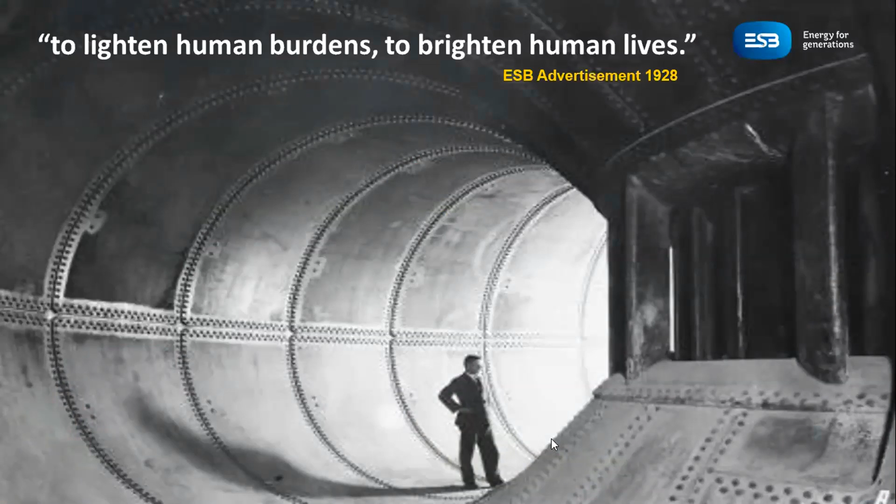As Con mentioned in my introduction, beyond 30 years now. Last September was my 30th anniversary with ESB, and I've spent a lot of time through various business units. And currently seeing very, very significant changes in the organization in terms of the challenges that we're facing. Interesting, just to look back to 1927, 28, when ESB was first established, and we reflect on the kind of mission that the company set itself at the time, it isn't hugely different to what we're facing right now in terms of the climate challenge across our business and globally across all sectors. So I think it's interesting to reflect back and remind ourselves of what ESB was about at the time and what its strategic objectives are right now.

I'm sure many of you know about ESB, but unfortunately, you can't avoid the bit of PR at the start. As an organisation, we have a lot of activities across Ireland and UK, particularly in the generation area. As you probably well know, we own the transmission and distribution networks in Northern Ireland through NIE Networks and in the Republic of Ireland through ESB. And obviously we have supply businesses in the Republic of Ireland, Northern Ireland and, in the last couple of years, in the UK in a company called ESB Energy. Not a big player yet.

I think our customer count is around 100,000 customers, but obviously making progress in what is a very, very challenging electricity retail market. We also have businesses in EV development, the development of EV charging infrastructure in London in particular for London taxis. We also have projects going on in Birmingham, Manchester as well.

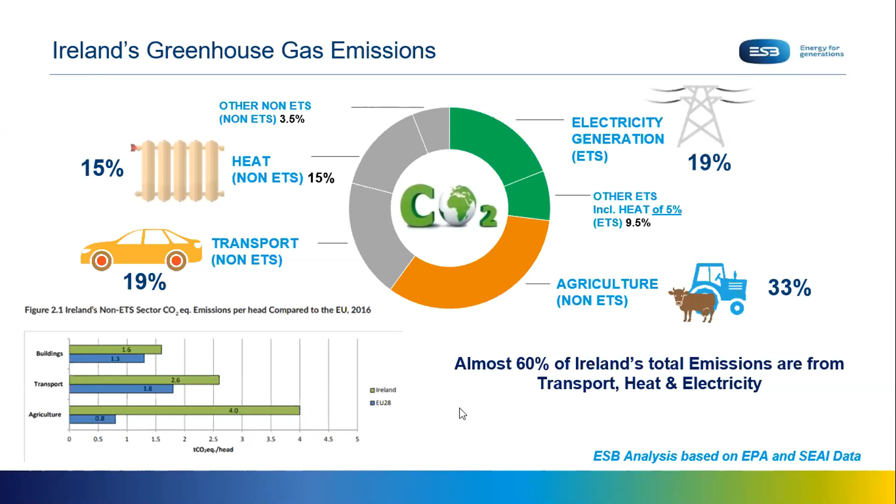There is heat also included in what we call the emissions trading scheme sector, which I probably won't go into much detail around today, but there are significant opportunities within that sector too, for electrification, but also obviously for hydrogen, which is receiving a lot of attention in recent years. So, as I say, that's the picture in Ireland.

We've also seen in the last couple of weeks, just before Christmas, 2 of our Midlands peat plants come off the bars. So again, that will have a significant impact on the data for the years from 2021 and beyond. And Moneypoint as well, our coal plant, has seen significant reductions in its generation contribution over the last number of years. But there are significant challenges with all of these closures, and creating flexibility to respond to the ever increasing amount of non-synchronous generation on the system has been managed extremely well so far, it must be said. But there are challenges as we drive deeper into decarbonised electricity generation.

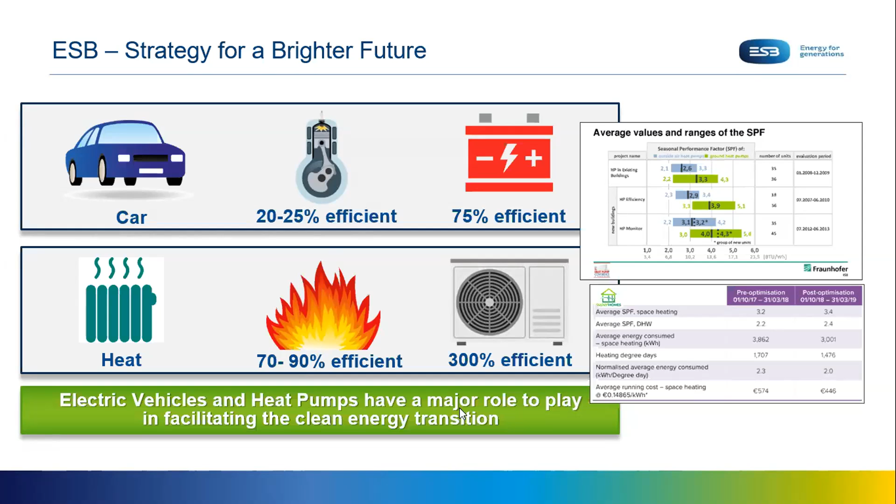And then latterly, we were involved ourselves in a project deploying heat pumps into existing dwellings that were retrofitted with improved insulation, improved ventilation, air tightness, etc. And even well installed heat pumps that had originally achieved SPFs of about 3.2, further commissioning, review and optimization of the system in the home drove out even more improvements, particularly raising space heating up to 3.4 and domestic hot water up to 2.4. So absolutely, the technology can deliver the type of efficiencies that are being presented by manufacturers. We've seen it, and we've done live testing ourselves on that.

And if we look then at going back to the greenhouse gas emissions, we did talk about the scale of the UK challenge as opposed to Ireland's challenge, but you can see they're very similar. Buildings are contributing relatively similar numbers to the overall carbon emissions inventory, so about up to 15% and more when you include industrial heat, etc. Sorry, this is just buildings. So in terms of buildings, the 15% comparison is quite close to the UK situation.

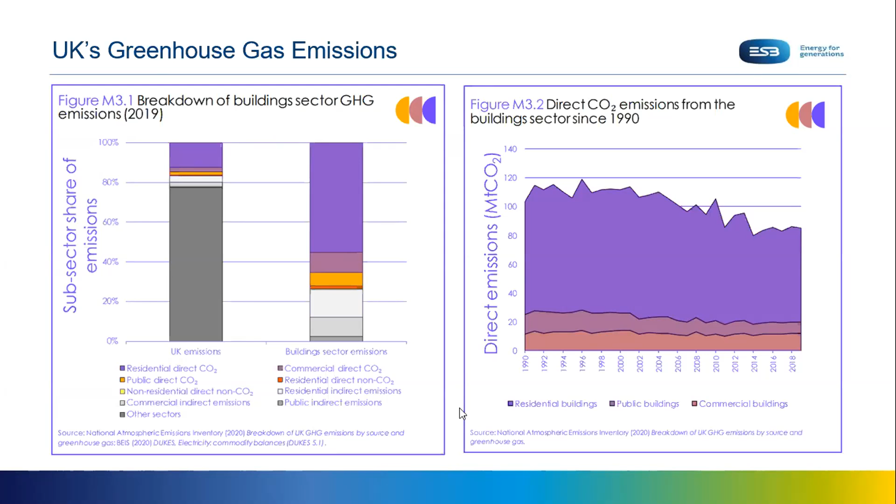And you can see there on the right, these are extracts from the CCC's sixth carbon budget. You can see the reduction there in consumption from buildings. Again, some of that is down to energy efficiency, some of it is due to economic circumstances. There are probably blips there over the last 10 years where there have been challenges. But the trend is down, though it's flattened, as you can see in the latter years out to 2018, 2019. So there's a big way to go to achieve zero carbon or anything near that. So, very similar challenges we share.

And the other thing to bear in mind is what are we doing now? Every new building we introduce into the stock, be that commercial buildings or homes or apartments, every dwelling that uses fossil fuel based technologies rather than taking advantage of low carbon options at the moment, is more carbon into the already overflowing bath of carbon, as an analogy.

So with our existing homes we have a significant challenge, and I'll talk a bit more about that in a second. But every new home we build, we should ensure that we have future-proofed it. As I say, I'll come to how that could be brought about and what's been happening in the Irish context, and reflect a bit on what I see from the sixth carbon budget. So there's significant growth and demands going to be placed on our system. It's not a static problem. We have significant inflation of our carbon challenge in front of us if we don't deal with it right now. So time is of the essence.

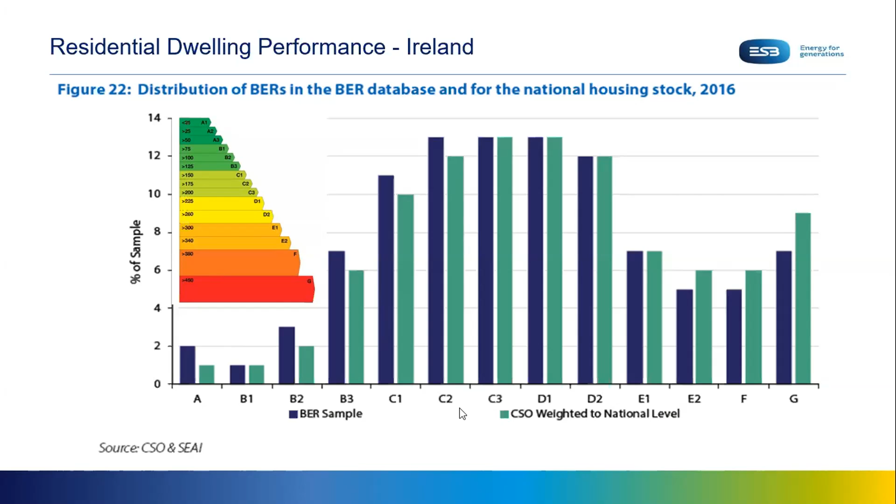And it is not just about Ireland and the UK. Across Europe, there is a recognition that buildings need significant renovation to achieve the scale of energy efficiency improvement primarily, but then to be able to facilitate deeper decarbonisation of those dwellings. So this is a European-wide challenge. The EU launched the renovation wave last year. So again, significant political recognition for the challenge and the opportunity to address the energy efficiency of our homes, coupled with transition to low carbon heating sources.

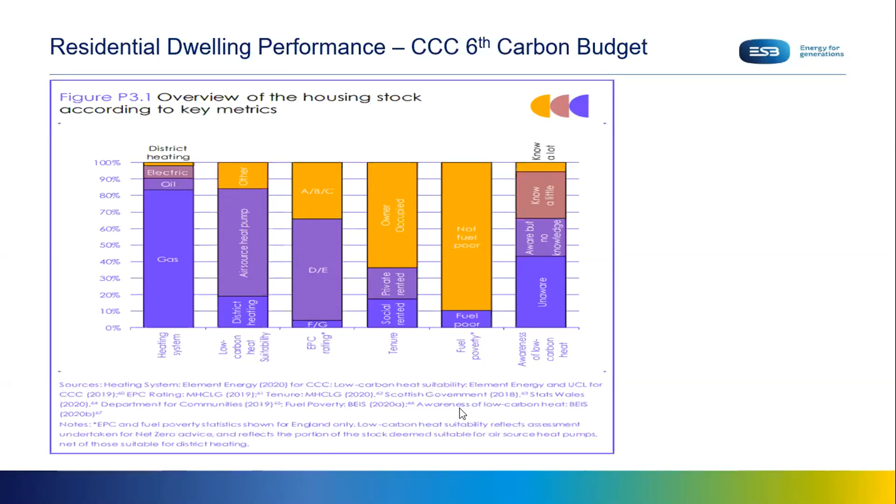So going back to Ireland's Climate Action Plan, a little bit more detail in here, some of which will be relevant, some less so. We mentioned heat pumps being central to decarbonisation. We're planning to install 600,000 by 2030. Of that 600,000, approximately 200,000 will be in new builds, the idea being that we'll be building approximately 20 to 25,000 houses per annum. So over the decade, we'd hope to see the vast majority of those homes deploying low carbon heating systems, predominantly heat pumps, over the next 10 years and beyond.

Simultaneously, they've called out a ban, as it was described in the Climate Action Plan, on oil and gas boilers being installed into new homes, oil by 2022, gas by 2025. The reality here is that oil, and I think it's similar in the UK, is not a huge factor now in terms of new build.

But gas obviously does continue to be installed as we talk. And we have our assertion that we need to challenge the 2025 date. That's 5 more years. That's potentially another 100,000 homes that may be adopting gas boilers that may well and will have to be replaced if we're serious about achieving our ambitions. So why not make that change now and mandate a low carbon technology earlier than that?

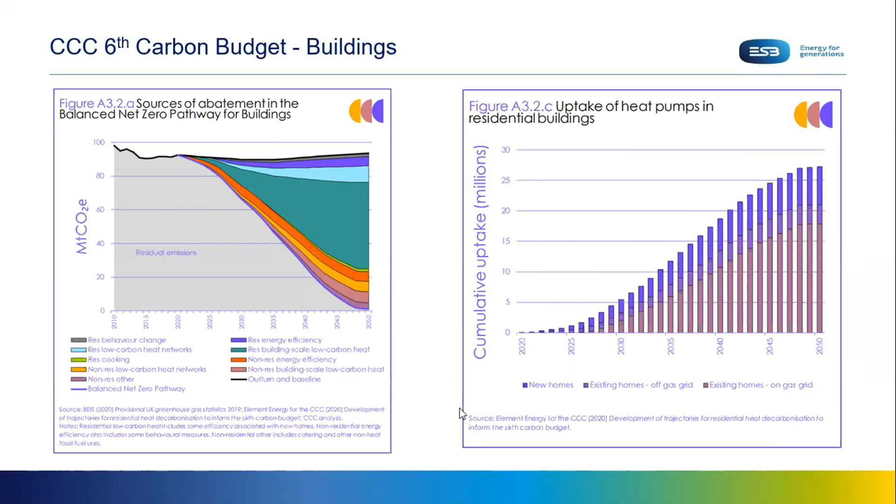So there, again, the depth of renovation, the depth of measures required to achieve that will vary from house to house. And in the UK context, I think it's important, to ensure that we achieve the type of decarbonisation potential that we need, to look at the energy efficiency of the dwellings. It is noted here, but the scale of contribution looks relatively small in a UK context. We would see the potential for about 30% savings in a home through energy efficiency, and then a further 45 to 50% being achieved through the deployment of a heat pump in particular. So the challenges are very similar. Just the scale is somewhat different compared to ourselves.

And then looking at new homes, the improvement and the reason that heat pump deployment has increased in Ireland in particular. Obviously in the UK, the RHI had a significant impact on the deployment into existing homes. In Ireland, the increased deployment of heat pumps has been into new homes, and that's been driven by the development of our NZEB standard, which, as I mentioned, was introduced in 2019. And you can see the benchmark reductions over the various iterations of the building regulations, in particular from 2005 through to 2019, and significant improvement in primary energy in our homes. A typical home now is meeting an A2 standard.

But the building regs, like in the UK, are technology agnostic. You can technically deploy an oil boiler, a gas boiler, or a heat pump. But in order to do that, the gas boiler will require you to install an alternative renewable technology. Over here, solar PV is the predominant technology that's deployed. Solar thermal in some instances.

But the latest iteration, Part L in 2019, has seen a significant shift across to heat pumps, driven by the fact that it's more or less cost neutral for the developer, and ultimately it's the developer who makes the decisions around what he's building, certainly up to now. Going forward, I think there will be more demand from our citizens to deploy low carbon, future-proof solutions for them. As I say, there is cost neutrality. There is the benefit then of zero local emissions.

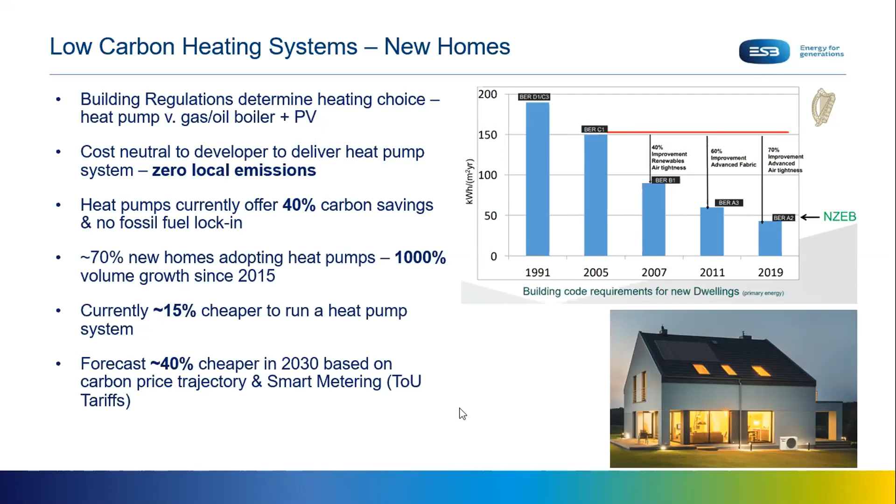As I just mentioned, the numbers and the scale are very small compared to the UK. I think the UK in terms of the RHI has seen about 40,000 heat pumps deployed over 6 years. So you can see last year we had about 8,000 heat pumps installed. Now these are only homes that are actually registered on our BER, the Building Energy Rating database.

There is another cohort of homes out there, called one-off homes, that are built by the occupiers, and they're not necessarily required to register BERs currently. I think that will change. So even though our CSO would have advised that about 18,000 to 20,000 houses were built in 2020, there are gaps in the numbers in terms of what's being registered, but anecdotally we would know that heat pumps have a very strong foothold in the one-off space as well.

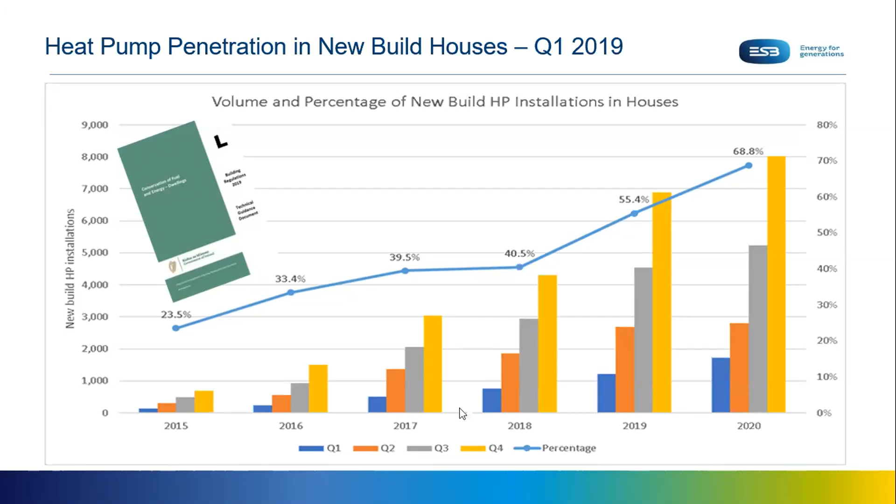So you can see 1000% growth since 2015. Growth to 70% deployment of heat pumps in new dwellings from a position of about 25% back in 2015, and all of that driven, in fairness, by the building regulations setting higher energy efficiency, carbon efficiency, and renewable energy targets.

And again, the Future Homes Standard. I know there was a consultation last year. There was a document issued in the last week or so with the outputs from that consultation. But clearly, the UK have indicated that they're very much minded to drive towards deeper decarbonisation, very similar to the type of standard that we have achieved in Ireland since 2019.

And if you just look on the left-hand side there, just as a matter of comparison, Ireland's building regulations currently are rated very highly by the Global Buildings Performance Network in terms of how they apply, in particular in the area of renewables and energy efficiency. So the UK is not far behind. I think that's just England and Wales, as far as I can gather from that data. But you can see that what's been set out within the Future Homes Standard would suggest a drive closer, aligned with the kind of standard that we're deploying currently in Ireland.

And again, I think a technology agnostic approach has been proposed within the Future Homes Standard as well. But just bear in mind the importance of ensuring that the type of numbers being suggested for heat pumps are realised, and a lot of that will come down ultimately to the choice of the developer. But there is still the scope to continue developing and introducing more carbon intensive dwellings into our housing stock. Now, acknowledging, of course, that in due course, certain districts have been identified for district heating and for the deployment of hydrogen clusters and decarbonisation of the gas grid.

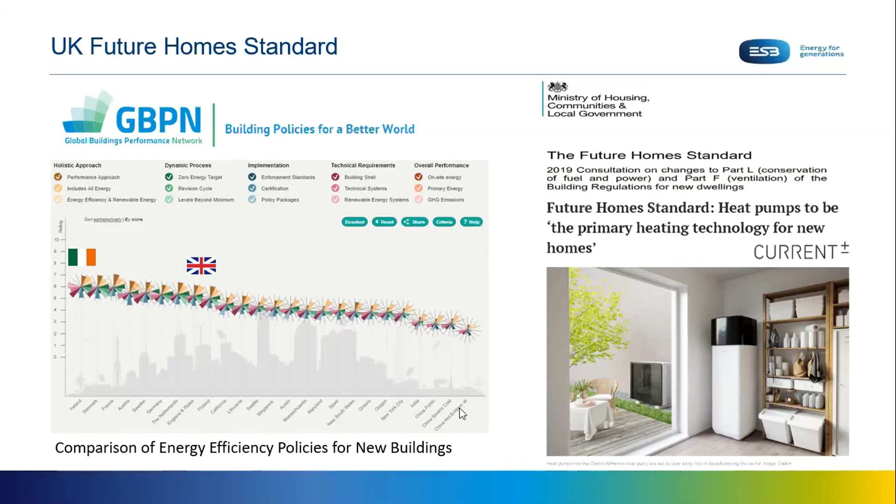Just new build and existing homes, we touched on it a fair bit. I mean, Ireland is a big outlier in terms of CO2 emitted from their homes. The one thing to focus on is the cost of retrofit, as we apply it here through improvements required to achieve a minimum B2 and even higher in some cases; it's not an inexpensive activity for the homeowner.

So while there are very generous grants of about 35% available for those works, there's still a big financing gap there to be filled. So there are challenges ensuring that we can provide customers with choices in regard to financing, and that might be low interest rate loans. It might be reductions in property tax associated with the building energy rating. And there are other ways, as I mentioned earlier, by which that could be facilitated. And there's a lot of work going on within our Department of Environment and Climate Change currently around this area.

But what's interesting, as I say, a consequence of the shift to heat pumps in the new build scenario has seen a lower deployment of solar panels on new homes. So in reality, a home that has a heat pump is probably a better fit for solar PV in terms of self-consumption than would be a house with a gas or oil boiler.

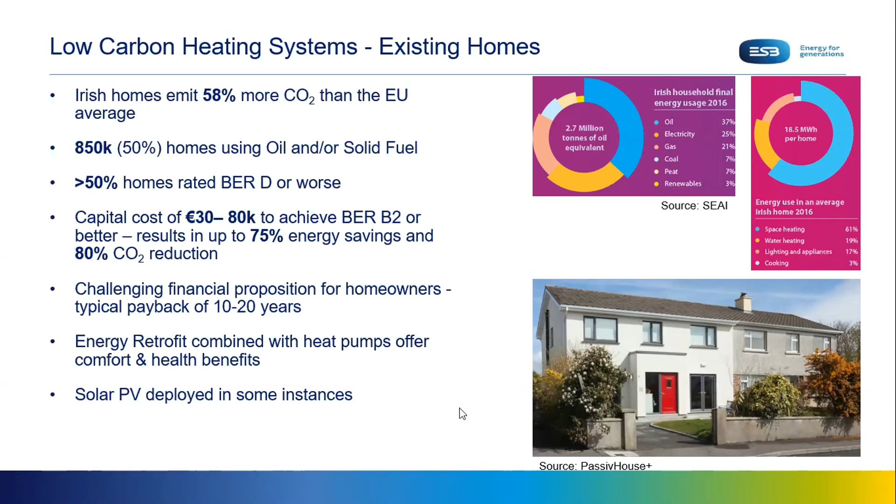And I suppose my concluding slide really is around what we're currently seeing in terms of new homes and existing homes: very much the deployment of heat pumps in new build, solar sometimes with that, solar sometimes on renovations. But as we look forward, we now need to consider the wider implications of the electrification of transport as well in terms of home charging.

So again, building regulations are under review. It hasn't quite been concluded yet, where there will be a requirement to make provision for home charging in new dwellings. I know that some local authorities already include as part of their requirements for planning, in apartments in particular, requiring a certain percentage of parking spaces within the parking areas of apartments to be ready for EV charging.

We also then consider the integration, as I've mentioned, around gas, electricity and heat, and how all that will come together through district heating networks, but also through the deployment of battery, vehicle to grid technology emerging in time, and obviously the home having its personal battery alternatively. So there's going to be significant deep sector coupling arising over the next couple of decades.

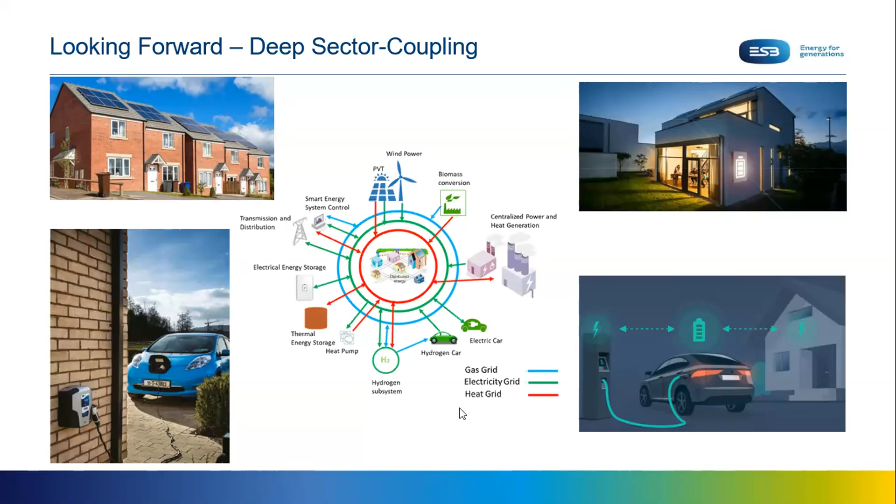We're at the very early stages of that, lots of projects going on, lots of technology development happening around the world in this area. But right now you don't see much of it if you go into a new home. But that landscape will change significantly over the next decades.

I know plenty of my neighbours talking about the challenges they're having when they're in a place all day, in terms of both the cost of running the house and just the general comfort levels. And you also need to think about the health and well-being of ourselves and our children; the benefits that can be brought through decarbonised fuel sources, zero emissions homes, etc., is the way to go.